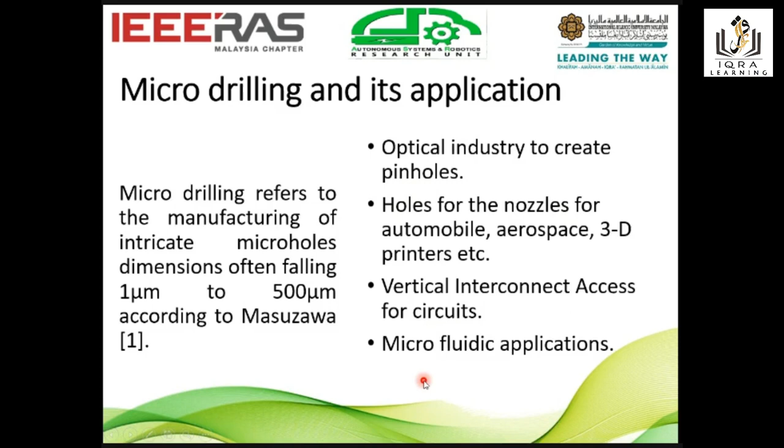There are typical methods for micro drilling. One of the common methods is mechanical micro drilling, where manufacturers use mechanical micro drills to carry out the drilling operation. A very recent, very popular technology is laser micro drilling. Another one is micro electro-discharge machining. We also have FIB, focused ion beam machining, and ultrasonic machining.

There are various technologies available for micro drilling operations, which can be broadly classified into tool-based and beam-based applications. For example, micro electro-discharge machining and mechanical micro drilling are mostly tool-based, whereas laser beam micromachining or focused ion beam machining are mostly beam-based micro drilling operations.

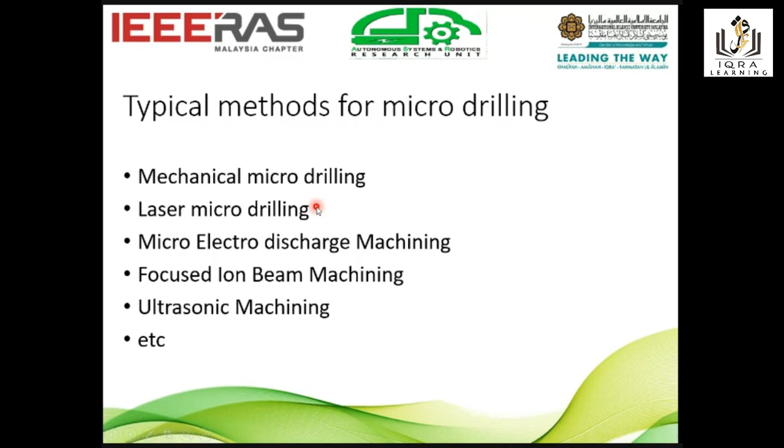Now, in the laser drilling process that we have in our laboratory, it's basically a desktop fiber laser machine, as shown here. We have a laser source, a vertical stage to adjust the focus of the laser source, and this is the F theta lens from where the laser is emitted. We also have a galvanometer, which basically has two mirrors, to project the laser spot in the XY direction. This is how the laser spot is scanned through the surface using this galvanometer.

Once it is scanning, it can create a structure. For our case, we try to create a circular structure like this. The spot size of this particular laser is 40 micrometers in diameter, and the scanning spacing between each scan line is about 10 micrometers. The program diameter that we programmed to make this scan was 200 micrometers, so this diameter was 200 micrometers.

So this is the setup that we have in our laboratory. It's a desktop machine, so it's not a very big machine.

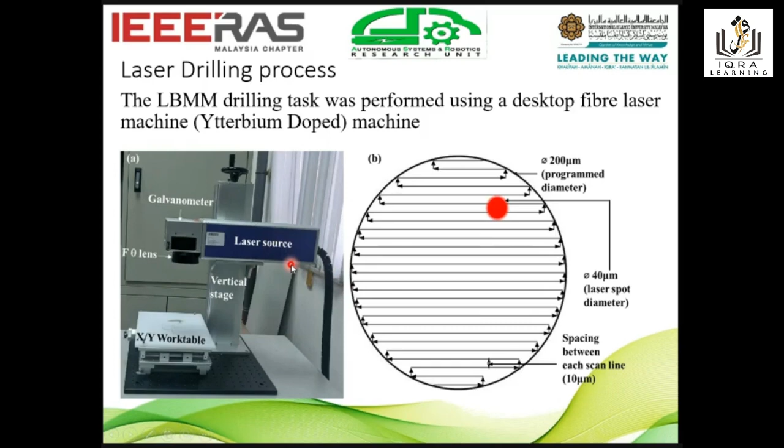The problems associated with this laser beam micromachining we have found—because this is a nanosecond laser, not a very ultra short laser pulse—come with certain issues, as you can see here. The major problem is the recast layer: a re-solidification of the molten metal that is ejected from this workpiece, which creates a recast layer.

Also, this circularity is not very uniform, as you can see—it's not a very nice circle. Also we have another concept of heat affected zone, which damages the surface not only in the hole area but the surroundings. So these are some of the problems associated with laser beam micromachining.

So when you use laser beam micromachining to drill the micro holes—I forgot to mention the workpiece material used was stainless steel of 0.2 millimeter thickness, and the programmed diameter of this hole was 200 micrometers. However, the actual diameter varies depending on the laser power and scanning speed we used.

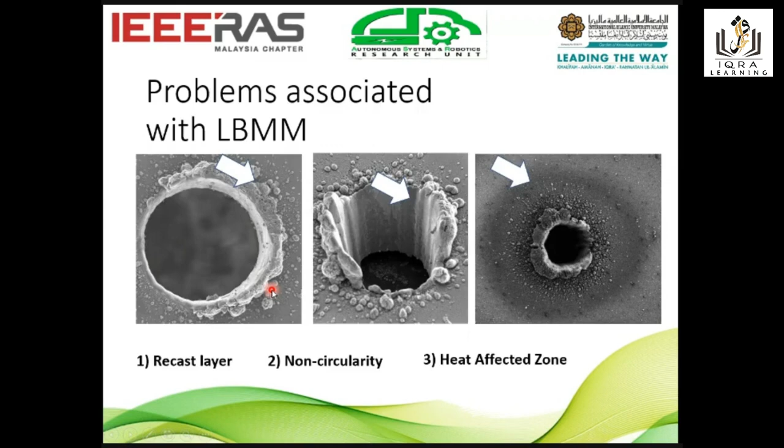So how to overcome this problem? Researchers have reported that under optimum processing conditions, ultra short lasers like picosecond or femtosecond lasers can produce precise microholes with reasonable dimensional accuracy and almost zero or very reduced heat affected zone and recast layer.

But one of the major bottlenecks for ultra short pulse laser systems is the very high initial cost, and further this type of laser is relatively inefficient when we want to drill very thick material, more than maybe 0.25 millimeter or so. So costing is the main issue here—very high initial cost for picosecond or femtosecond laser, and material removal is also very slow for ultra short laser systems.

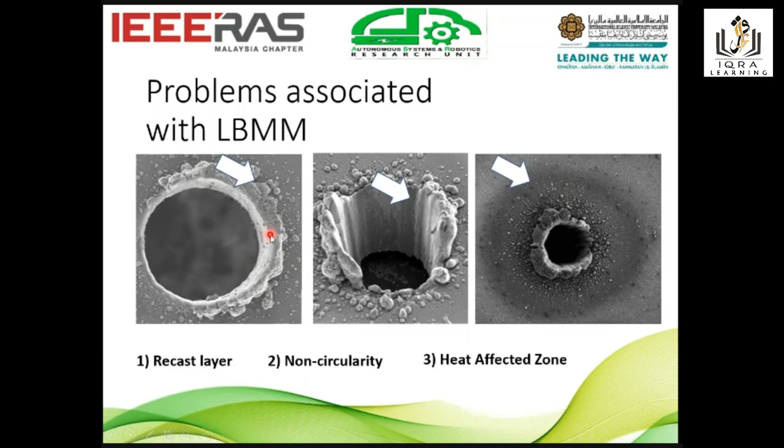As I mentioned in the previous slide, the laser we are using is a nanosecond laser. For this case, it's a nanosecond laser. So for nanosecond lasers, we cannot achieve very high quality morphology of the drilled holes.

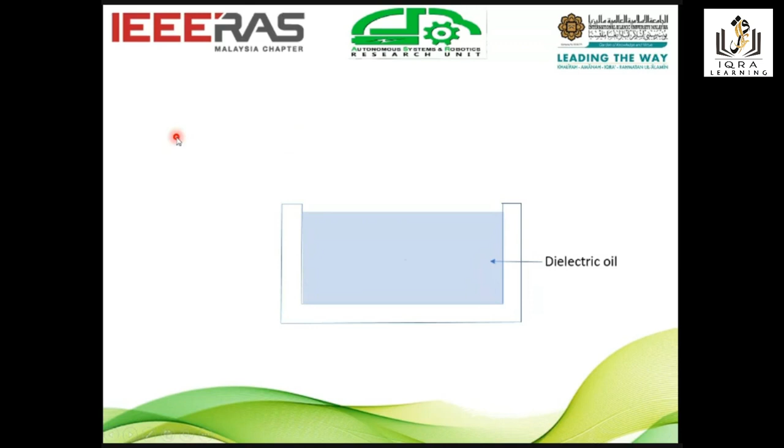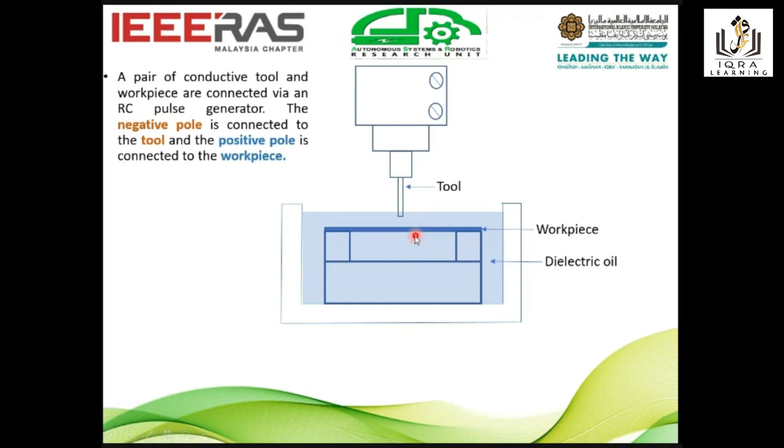Now, on the other hand, micro electro-discharge machining is another technology. Let me describe a little bit about micro electro-discharge machining. In micro-EDM, we have a pair of conductive tool and workpiece connected via an RC pulse generator. This is the tool, which is electrically conductive, and this is the workpiece, and they are connected via an RC pulse generator.

As you can see in this figure, the negative pole of the RC pulse generator is connected to the tool, whereas the positive pole is connected to the workpiece. So the negative goes to the tool and the positive goes to the workpiece. This is basically the conventional EDM, where you want to erode materials mostly from the workpiece, so we put negative on the tool side and positive on the workpiece side.

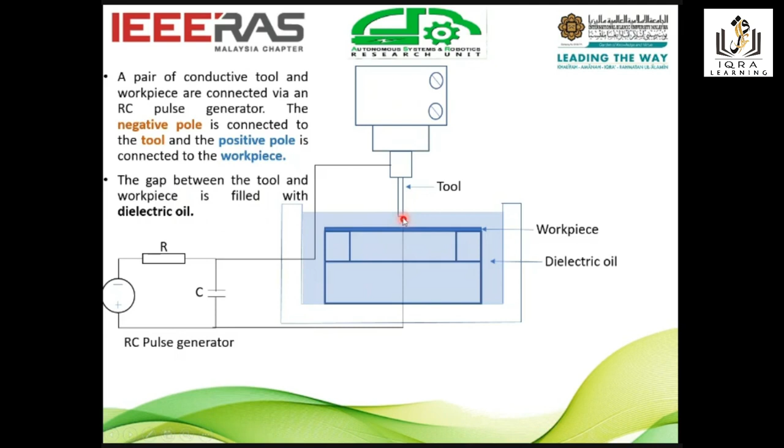Now, the gap between the tool and the workpiece is filled with dielectric oil. As you can see, the gap between the tool and the workpiece is basically filled with dielectric oil.

Now, when this tool approaches very close to the workpiece, the dielectric barrier breaks down and plasma forms, causing sparks. This spark is repetitive in nature, and it basically erodes the material from the workpiece mostly because of electrothermal reactions. The replication of the tool is basically carried out on the workpiece.

So the tool is cylindrical, so a cylindrical hole will be created on the workpiece. And as we go along, debris is formed because of the electrothermal erosion of the workpiece, and that debris sometimes causes a short circuit. Instead of creating sparks, the tool basically touches the debris and creates a short circuit, which is not healthy for the machining because it slows down the overall machining process, as we will see later on.

So this is the basics of micro electro-discharge machining.

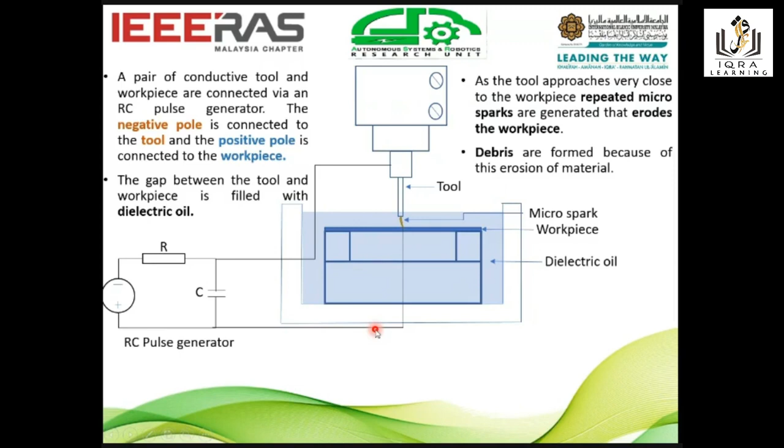Now, the comparison between LBMM, laser beam micromachining, and micro electro-discharge machining: LBMM is basically a thermal ablation process, whereas micro-EDM is an electrothermal process. LBMM is considered to be very fast compared to micro-EDM, which is a very slow process.

On the other hand, in terms of hole quality and circularity, LBMM is poor, but micro-EDM is much better in terms of circularity compared to the LBMM process. You have very high heat affected zone on the LBMM, whereas it's almost zero and there is no visible recast layer for the case of micro-EDM. LBMM is relatively costly, whereas micro-EDM is a relatively cheaper solution.

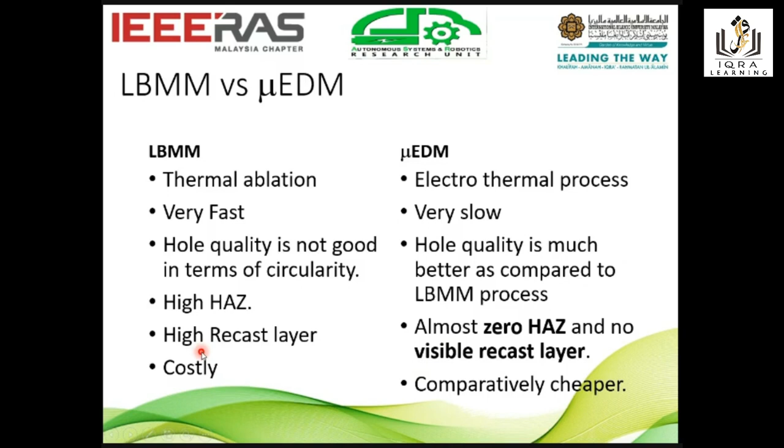So what we want to do in this research is basically integrate these two processes so that we can harness the advantages of both. So we try to assimilate these two processes, and we want to do a sequential process.

First, we want to carry out laser beam micromachining, the pilot micromachining, to make the pilot hole. Then finally we carried out the micro-EDM finishing operation to get the final holes. So this is the process integration we wanted to achieve.

We have both the machines. As I have mentioned, this LBMM setup is available in our lab, and beside it we have this micro electro-discharge machining system, which is equipped with an on-machine measurement device, OMM, with a digital camera and optical lenses attached. So this is the schematic of the system.

We carried out this LBMM machining on the workpiece, and then we transferred this workpiece into this Micro-EDM setup, and carried out the Micro-EDM finishing operation. So this is how we carried out the whole LBMM Micro-EDM sequential micromachining process.

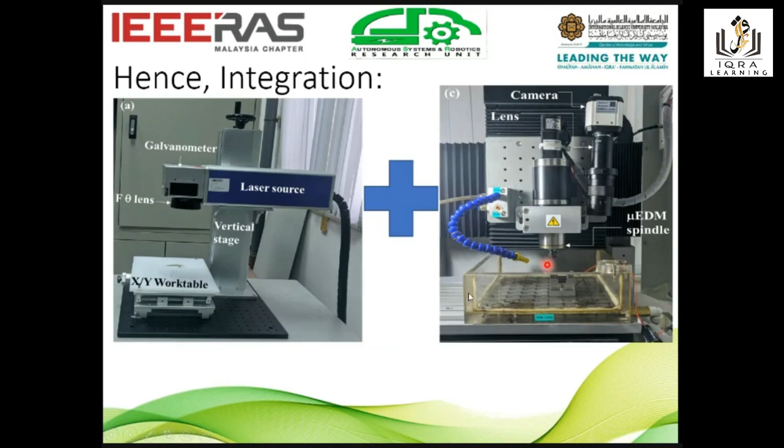As you can see here, this is the OMM system, on-machine measurement system. This is the tool, this is the spindle, and at the bottom we have the electrode or the tool for the micro-EDM operation. This is basically the fixture that carries the LBMM holes, which we then transfer along with the workpiece into this system.

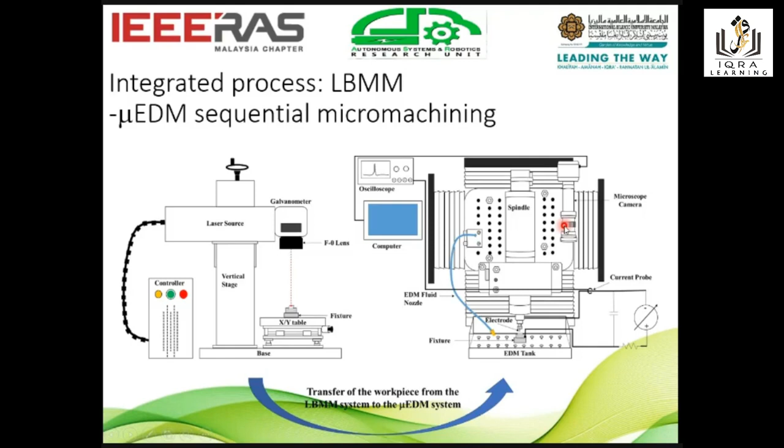Now I'm going to explain the whole tool positioning system. What we do here is first create a random hole on this workpiece. This is the first hole we make, which we call the reference hole, for positioning purposes. Once we make this hole, we know exactly what the position of this tool is from the feedback from our controller.

Then what we do is shift this axis, because this is mounted on the x-axis, and we bring this camera right on top of this reference hole. Because in the camera we have a crosshair, we can precisely locate the center position of this hole through the crosshair mark.

We note down the position of this camera location, right on top of this hole. Then we shift this whole system in the XY direction to any of the holes previously machined by the LBMM process. So we bring this camera from the reference hole to any of the holes where we would like to carry out our finishing operation, and we know the second position, and the difference between these two positions is the difference in X and Y direction from the reference hole.

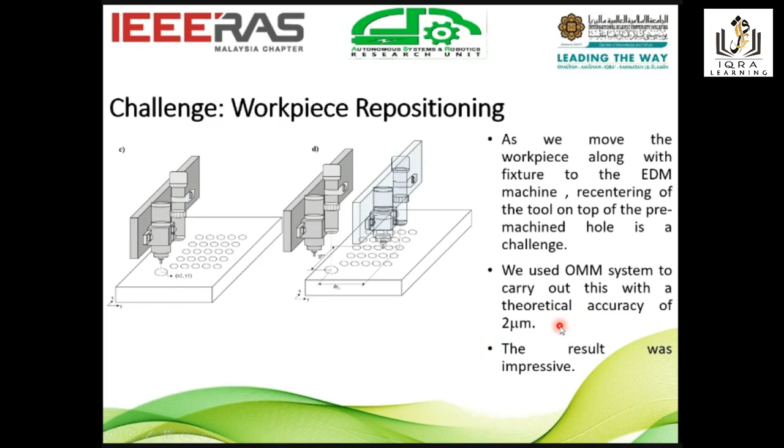So we can say that this repositioning accuracy is within the range of 2 micrometers, and this is a proof that the centering was quite okay.

So what we did is basically we made a LBMM hole first, and then we did an EDMing operation on this LBMM hole. We did not make the full through hole, meaning we did not complete the whole machining process. We stopped in the middle and took a picture to show that the LBMM hole is actually on the center of the EDM hole.

As I have mentioned, the EDM tool is larger than the LBMM hole. Our LBM laser drill hole was 200 micrometer program diameter, but the micro-EDM tool we used to fine finish this laser drill hole was 500 micrometer. So you can see the 500 micrometer hole is bigger, and the LBM hole is smaller. But the main thing to note here is that it is in the center of this LBM micro-EDM hole, so the centering was correct.

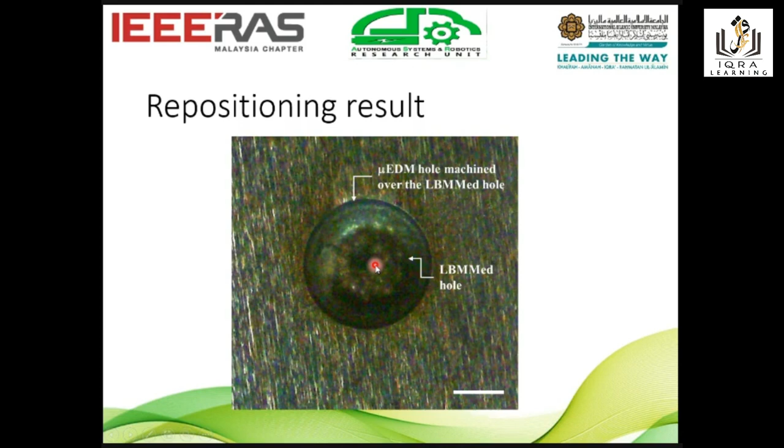That's the way we have achieved the centering position, the centering system, the tool centering system.

Now, then why do you have to go for micro-EDM, LBMM plus micro-EDM? Why not just do the micro-EDM by itself? That can be explained in the next slide.

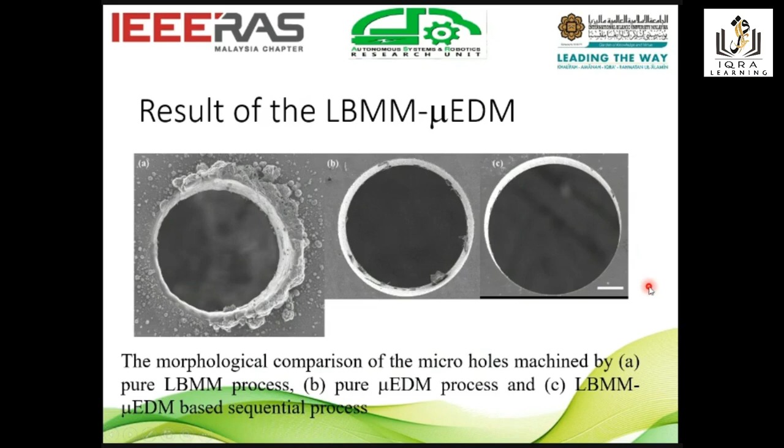You can see here that when we do LBMM micro-EDM, the time taken was significantly lower, which is 16.69 minutes, whereas when you do pure micro-EDM, it was almost 3 times or more than 3 times higher, which is 60.38 minutes. So in LBMM micro-EDM it is only 16.69 minutes, whereas in pure micro-EDM it was 60.38 minutes. So it's quite high.

So that's why we can achieve a similar quality hole as the micro-EDM with the help of the LBMM micro-EDM process.

Also, we have seen that tool wear was significantly lowered when we used the LBMM micro-EDM process, which was 5 micrometers, whereas with pure micro-EDM it was almost 52 micrometers of tool wear. The tool is expensive, so that's almost 10 times the tool wear.

Also, when you use the LBMM micro-EDM process, we counted the number of short circuits, which was less than 100 times in the whole machining process, only 31 times. But with pure micro-EDM, almost 1,000 or more short circuits happened. More short circuits is not good for the machining process; it increases the machining time and gives other detrimental effects on the micro-EDM process.

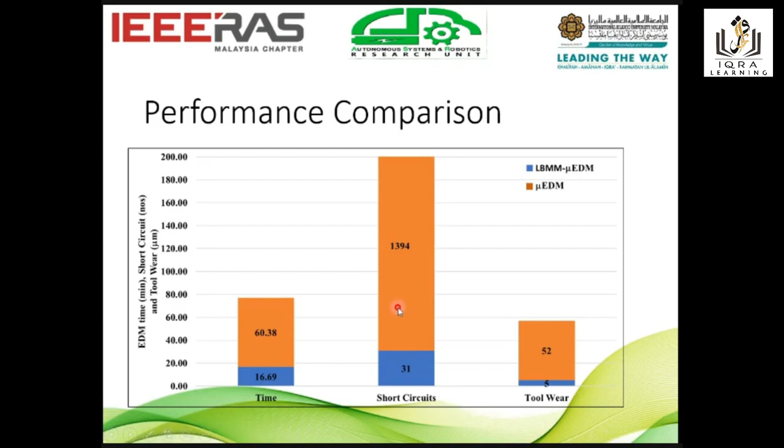Now, in our further study, what we tried to do is see how the LBMM parameters affect the performance of the secondary process. So now we have 2 processes: the primary process is the laser beam micromachining, and the secondary process is the micro-EDM machining.

In the laser beam micromachining, there are several process parameters such as the laser power you are using, the scanning speed of the galvanometer you're using, and also the pulse repetition rate. So there are several parameters that you can play with.

We want to see how these parameters affect the secondary process performance, such as the machining time, the tool wear, and the short circuit occurrence. So these are the things that we wanted to study.

So we wanted to do an initial parameter selection. In the laser, we selected power at 60%, 70%, and 80%. There's a typo here - it was not in watts, rather in percentage. The actual maximum wattage was 20 watts, so it was 60%, 70%, and 80% of 20 watts.

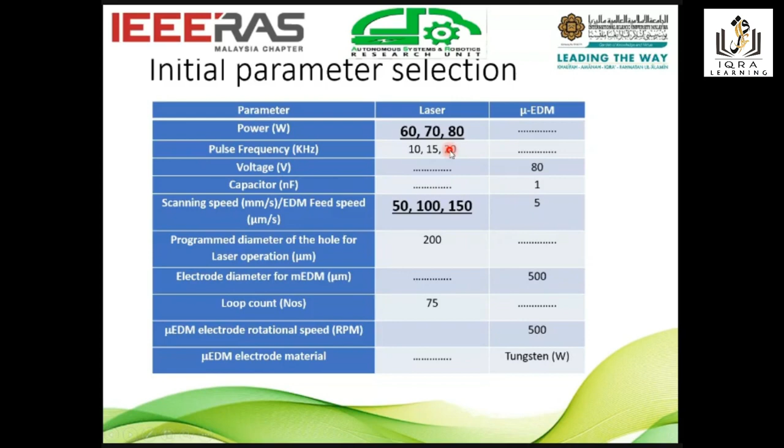I purposely kept these two things bold. You can see the laser power was not varied very widely - it was from 60 to 80, and the scanning speed was also 50 to 150. So they were not varied over a very wide range, rather in a narrow range for our first initial parameter selection.

And then we did find some variation as you change the laser power percentage and scanning speed. We saw that the entry area of the holes varied. If you use faster scanning speed, the entry area goes down, and if you increase the power, the entry area goes up, which is quite reasonable and straightforward to understand.

What happened here is basically when you go to faster scanning speed, the interaction time of the laser spot and the workpiece becomes less, that's why you have less penetration. But if you increase the power, of course the penetration would be higher, so your entry area would be higher. This is very straightforward to understand.

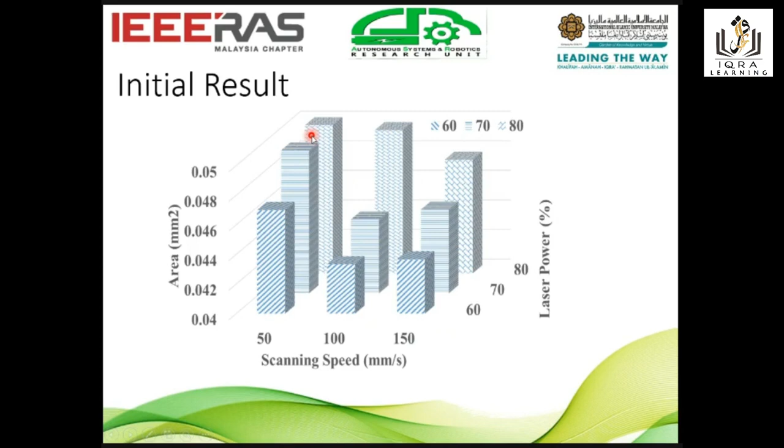The reason is because when you use high power, you have more initial penetration. When you go to high power, you have higher penetration, and because of that the initial material has been removed more, and you can have shorter machining time for the micro-EDM operation. So this is the reason for that.

But though we have seen some trend, the variation was not very significant. It varied only from about 15 to 16, or a little bit higher than that - only 1 minute or so of variation. So this variation is not very significant.

So this is the problem we face when trying to report these types of results for a good journal publication - there will be questions raised about what was your machining uncertainty, because this variation may come from the machining uncertainty also. So we have to measure the machining uncertainty. We saw that this variation is within the machining uncertainty - meaning if you repeat the same machining process 3 or 5 times, you get the uncertainty by measuring the standard deviation, and we saw that the variation we achieved is within the range of the uncertainty of the machining.

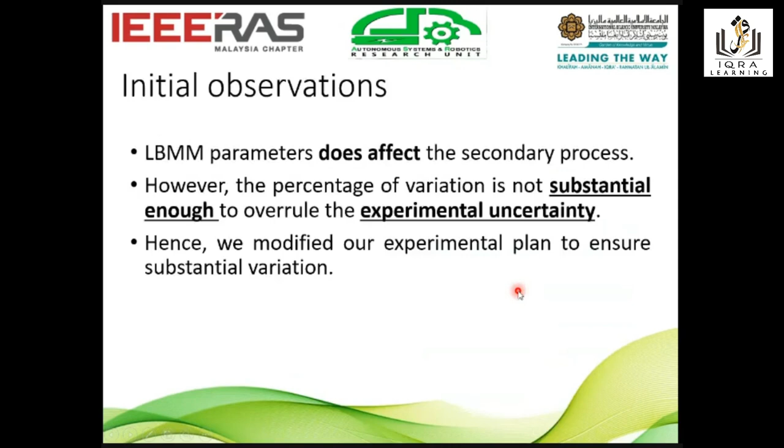In our secondary experiment, we varied the power in now 4 levels, over a much wider range from 15% to 90%, which corresponds to actual power varied around 6.4, 9.4, 12.5, and 15.5 watts. Also, the scanning speed was varied from 50 to 1400 millimeters per second. Previously it was only varied 60 to 80% and 50 to 150, but now we varied 15 to 90% and 50 to 1400 millimeters per second.

So this is how we modified our experimental plan. Pulse frequency we varied at 5, 10, 15, and 20. We did a full factorial experiment and kept our loop count constant. For the EDM process, we did not change anything, we kept it the same as before.

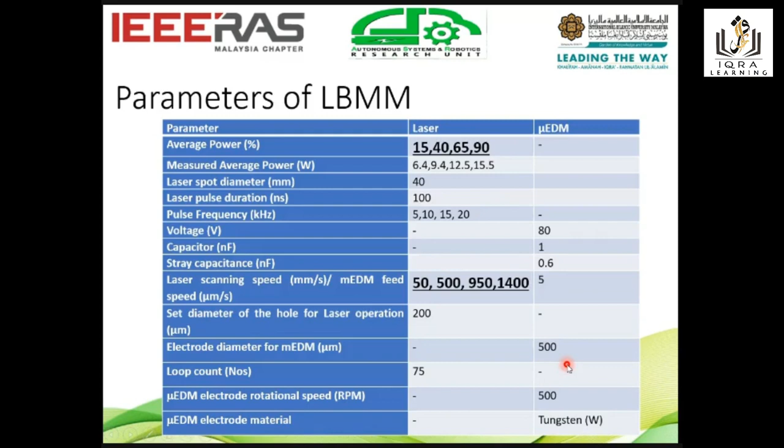Then we tried to see what happens here. We saw that scanning speed and laser power do vary the EDM time. The EDM time varies such that if you use higher power and lower scanning speed, you get a faster EDM time. The reason is that for higher laser power and lower scanning speed, you get larger initial penetration, so more volume is removed from the surface, meaning less volume needs to be removed during the EDM operation.

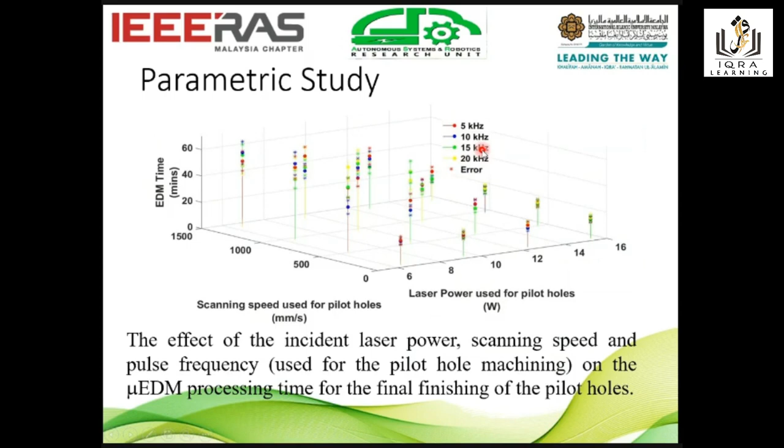We also noticed another interesting thing: for various pulse repetition rates, there is no significant variation. So the pulse repetition rate does not basically create any effect on the EDM performance. So for all these cases, we averaged up all the pulse repetition rates.

Another interesting thing: once we averaged the pulse repetition rate, we tried to make a surface plot with laser power and scanning speed on the axes. We wanted to create a zonal effect showing where the machining time zones would be, depending on what laser power or scanning speed you use for the initial machining of the laser holes.

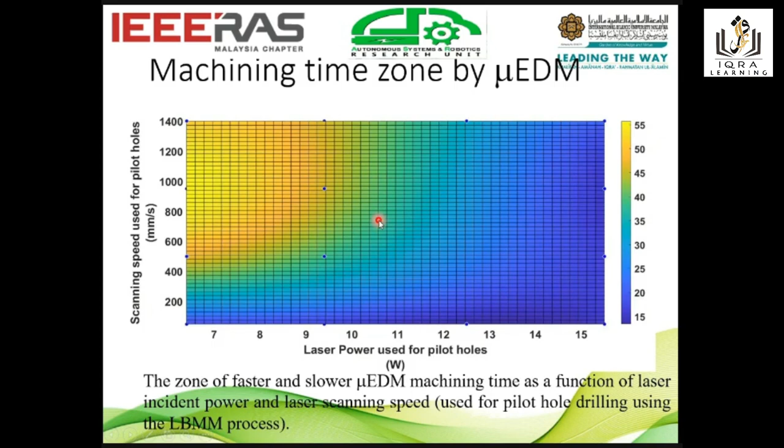So this is what we have done. We have also shown the machinability, just to give a better understanding, where we measured the machining against pulse frequency.

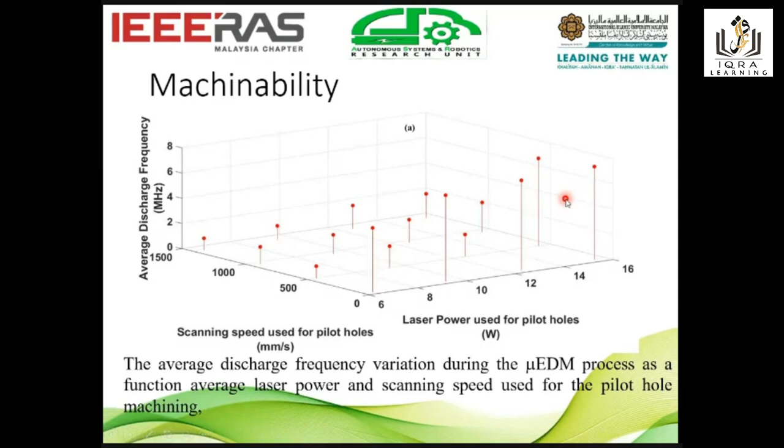During the EDM operation we use a high frequency ammeter, and that ammeter helps us measure the discharge pulses, helps us count the discharge pulses. We saw that the discharge pulse also increases when you use higher power and lower scanning speed. So because of the higher discharge pulses, basically you have better machinability by EDM operation.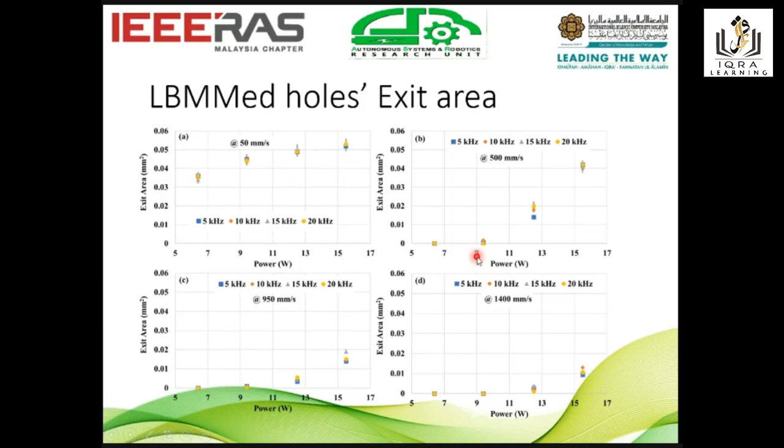So that's why the machining time was higher for EDM operation when we use low power and faster scanning speed. The machining time was higher because there was not much penetration at all by the laser process. We can see this proof from here as well.

So here you have full penetration, but here not full. Partial penetration here is almost like no penetration, no full penetration at all in these two cases. That's why we can say that when you don't have much penetration, EDM finishing operation takes much longer time.

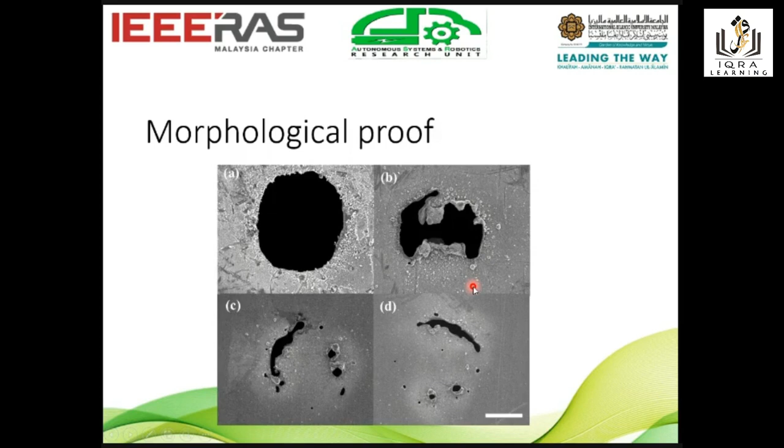So the overall volume was also measured instead of just pure entry and exit area, and we have seen that overall volume also increases with higher laser power and lower scanning speed, and hence the EDM operation was shortened when you use higher laser power and lower scanning speed.

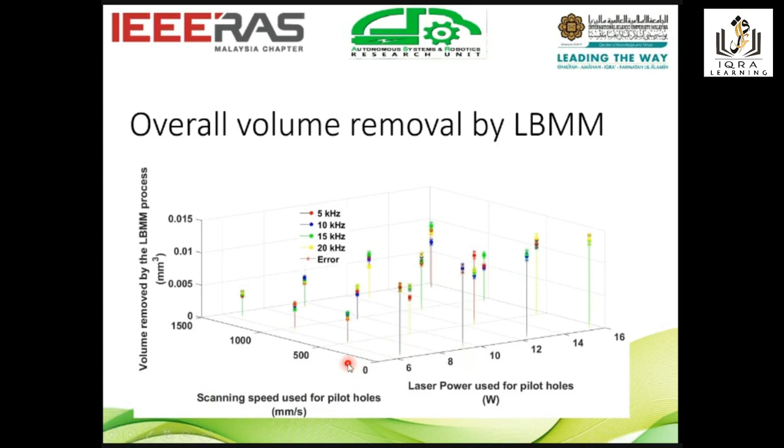We also measured the tool wear, and we saw that tool wear and short circuit reduce quite significantly when you use higher laser power, because when you do the EDM operation on these pre-machined holes, you can see the short circuit and tool wear go down significantly, as shown in these graphs. The reason is that tool wear and short circuit are highly correlated with the EDM time.

So the longer the EDM process, the higher the short circuit and tool wear. The correlation was over 90 percent, so we can say it's very highly correlated.

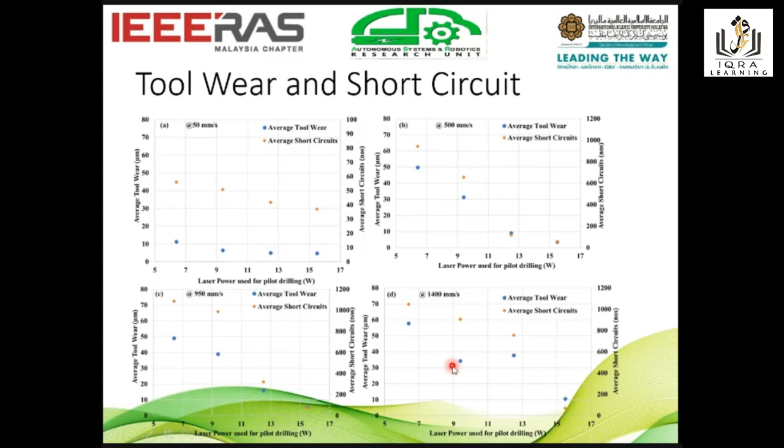Because when you use low power and faster scanning speed, you need a longer machining time by EDM. So when you have longer machining time by EDM, it enhances, in a negative way, the tool wear and short circuit. That's why basically it happened.

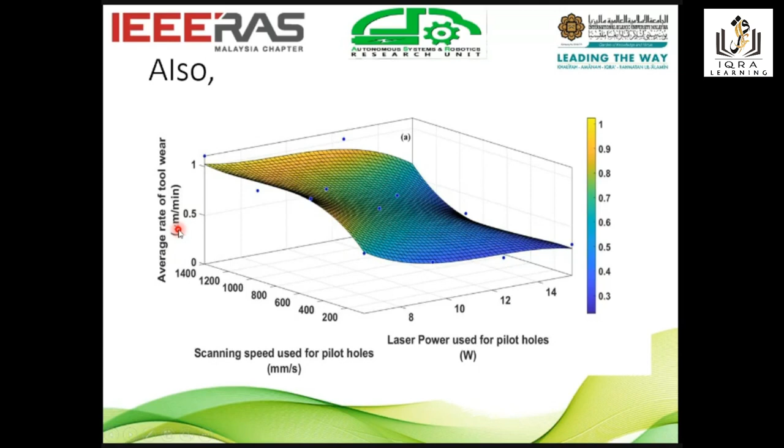Also, interestingly, we saw that not only the gross tool wear or the short circuit, but the rate also changes. When higher laser power was used for pre-machining and lower scanning speed, the rate of tool wear was reduced, measured in micrometers per minute, and also the short circuit rate was reduced, as you can see the number of short circuit occurrences per minute was also lower.

So this is another finding that we highlighted: not only the gross tool wear or the gross short circuit, but also the rate of tool wear and short circuit.

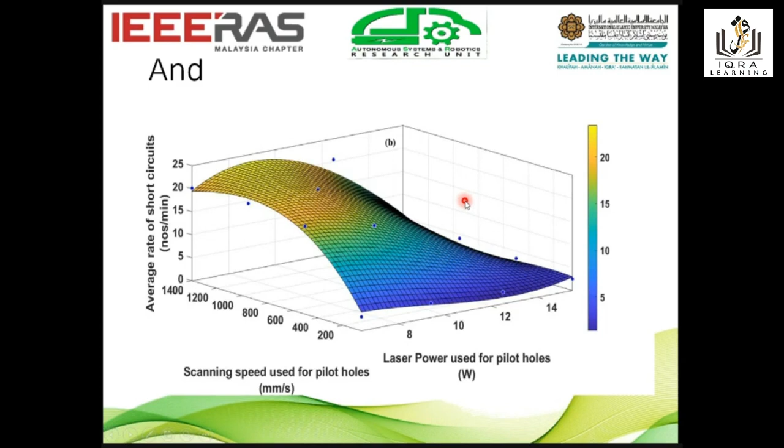I think that's all I wanted to share with you. So in conclusion, Alhamdulillah, we have shown a methodology to reposition the workpiece accurately after carrying out the LBMM process. This methodology can be implemented for any type of sequential process with the help of the OMM system.

We also defined an experimental zone for the LBMM process parameters, which can be used for a faster finishing process by micro-EDM with lower tool wear rate and short circuit rate. Another lesson we learned is that in experimental parametric studies, we should think about experimental uncertainty before we publish our results, to check whether our results can really overcome the experimental uncertainty or not.